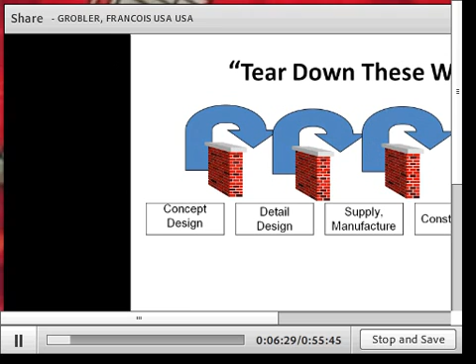As you might expect, there are all kinds of deficiencies as a result of these barriers. But at the bottom there, I think I just want to point out that I'm beginning to see the Corps of Engineers' responsibility very much in looking at this waste of resources that's happening out there, and the fact that we'll have to be building more with fewer dollars, and we have to do it in order to stay competitive in the world arena. I just listened this morning to the debt ceiling that has to be raised in six weeks, otherwise the government is going to stop functioning.

As you know, the debt ceiling is 16.7 trillion, and in addition to that, there are some other mandates that supposedly add up to over $100 trillion. So I think it's clear that in the future we have to do more with less.

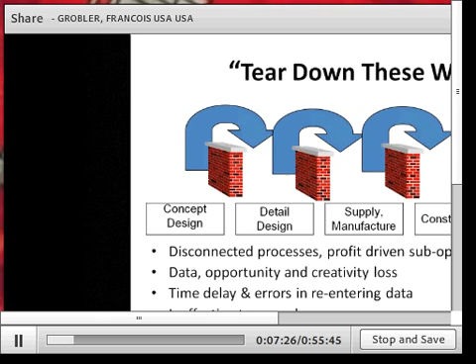This is the way I think we can address that to some extent, and we'll look at the extent in a little bit. The frictionless flow of information is what we're really after. If you start at the top there with design, construction documents, construction contract, and commissioning, those are the traditional arena where we're working, although we are spanning many of the other aspects now also.

The point is that as we develop documents and contracts and so forth, we want to deposit information that can be used later in the life cycle, and we want to take out information at a later point in the life cycle that would be useful to us.

And this is possible now using this IFC openBIM. It is a structure of information designed to carry the geometry of the building as well as tangible and intangible information in a way that it stays unified and can be used by others later. Now, not all information needs to be put in there, but the information that is used in the later operations.

So if you go around the circle clockwise, start with design and construction, or maybe earlier under the project program, and then you want to be able to later, when you're doing the FM and space management, check did that actually conform to the program? Or if you go further down, the master planning wants to know how did that work out and how can we do our next program better, and so on.

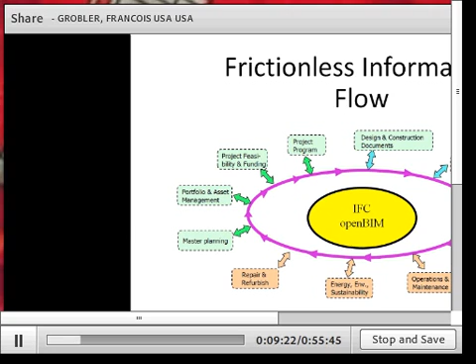It's a matter of data that we don't have at the moment, and I'll make reference to that in a second again. So what is BIM and what is openBIM?

I want to say first what it is not. BIM is not 3D CAD. I think many vendors and practitioners are thinking about BIM as 3D CAD, and that is not the case. And openBIM is not Autodesk or Revit or Bentley's proprietary formats.

openBIM is a vendor-neutral format to exchange shared information of the project and the facility as it moves along in its life cycle. And openBIM is unified information that serves as a resource for decision making and so on over the entire life cycle.

So I have a more formal definition of openBIM here. I'm not going to read it, but it's a digital representation, it's shared knowledge, it's the basis for decisions, it's based on the premise of better collaboration, and it's an open standard for interoperability.

So why open building information models? What does it really do for us? Owners, and I believe we're doing the same at the moment, are beginning to understand the value of data, and especially the life cycle values.

We're rebelling against being held captive by software vendors, being locked into a proprietary format so you can't use that new neat technology someone else had come up with. And we're realizing that you're paying for sub-optimization in those stovepipes or walls that we looked at earlier.

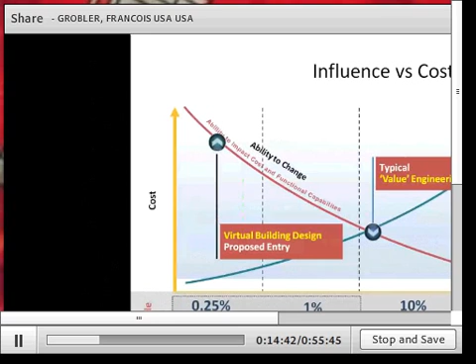Thanks, Mariangelica. Hello, can you hear me now? While we're waiting - yeah, you're back on. I'm not sure what happened, but I can hear you loud and clear. I think I leaned forward against my switch here that muted the button, so I inadvertently muted it.

How much have you heard of what I had to say about this slide? So we had just started this slide. Okay, well I'll try to repeat quickly then.

The organization of your tasks is arranged like in the green boxes up there, by task groups. The point I wanted to make is that in order to do life cycle cost analysis, how can you do that accurately without knowing the operational costs of similar and previous buildings downstream? We need the data, and the same for energy modeling - how can we know our simulations are correct if we don't have the measurement and verification downstream? There's great need for bidirectional flow of information here.

I'm sure you are aware of what's going on now through this series of presentations, but I think the consultants who are working on the engineering regulations down here should be very much aware of this also.

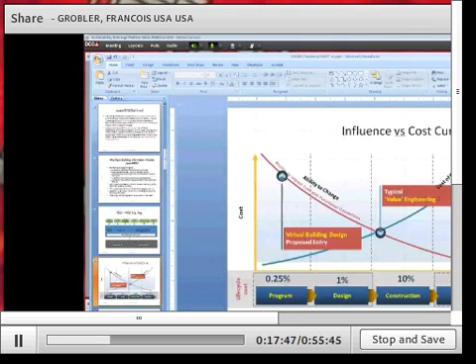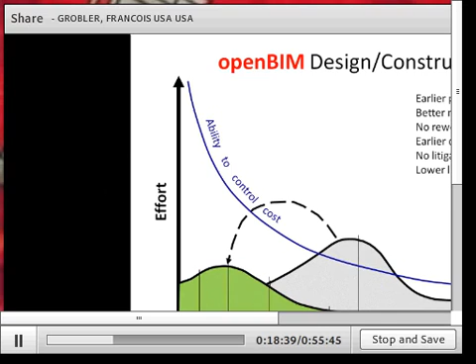So how much improvement is possible? I can give you the case of this UK BIM initiative that, among other things, conducted 5 pilot projects to test what savings they were getting. They did that in a specific district where they had to build 5 new penitentiaries - well-known designs with very well-known construction costs. 3 of those 5 projects are now complete, and they've proven they've saved between 15, 17, and 19% in cost over the expected cost based on previous experience, using this more integrated way of working.

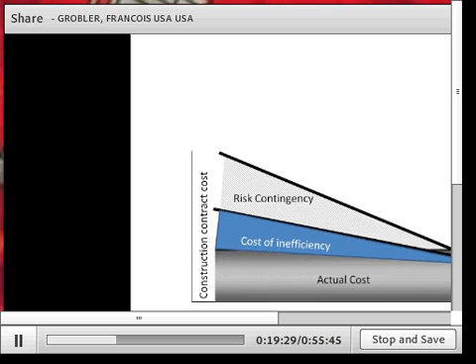One interesting part of that is they also expect to save millions of pounds in guard personnel costs over the lifecycle, because of how they interacted with users in the design process. They realized they can do with fewer guards if they make minor changes to the standard design, and that isn't even included in the 15 to 19% cost savings.

But the important point here is that this is their so-called level 2 BIM integration level, using current tools without the full integrated openBIM. In other words, these are things that can be done right now, tools they've already used. Anyone can do that if they make the effort.

A little more about the UK initiative. This fellow, Francis Maude, is apparently the number 2 person in the government there, just under the Prime Minister, and he is supporting and saying these things. It says this government's 4-year strategy for BIM implementation will change the dynamics and behaviors of the construction supply chain, unlocking new, more efficient and collaborative ways of working. This whole sector adoption of BIM will put us at the vanguard of a new digital construction era and position the UK to become world leaders in BIM. That sounds like a challenge to me, to the world's largest engineering concern.

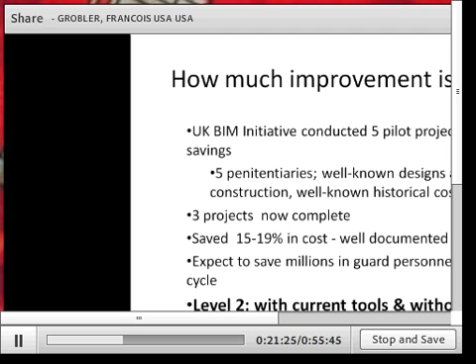I think it will be very worth your while to look at some of these things on this website, the BIM task group. This is the actual live website now, and you can see all kinds of information and resources there, like COBie UK, data drops, and other things. There's a lot of information here that would interest you, including their partners, tests they've done, news, and so on. But in the interest of time, I'll probably have to move on.

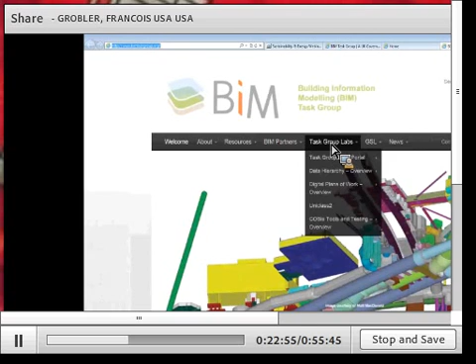Let me just go back here. I'd like to show you a little bit of Mark Bew's presentation, which explains the different levels, level 2 and so on. Mark Bew is the fellow really orchestrating this whole initiative, and it's a very large one. Most of the funding goes into working with industry to come up with standard terminology and standard processes, and some of this goes into the actual work.

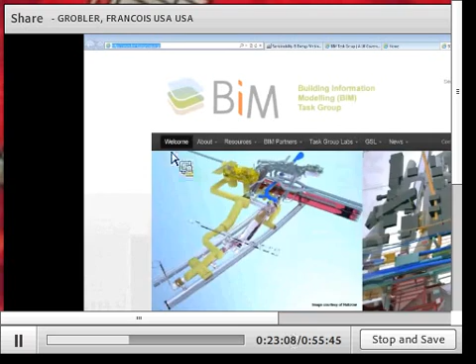This is based on some documentation that might interest you also. You can see this comes from a low carbon construction report and a building information modeling working party strategy paper. So this is the result of very deliberate planning. The hypothesis they're working on is that government as a client can derive significant cost improvements in cost, value, and carbon performance through the use of open shareable information.

I think this is the push and pull side we talked about earlier. On the pull side, the government needs to know how to be a good buyer of data. Data is very important now, and while we still think of ourselves as buying buildings, in fact we're buying buildings as well as data and services, and that pull side should be clearly defined and done consistently, leaving the how to the supply chain. On the supply chain side, early warning is necessary to give direction, assistance, and clear indications of milestones and expectations, as well as organizing training and developing the methods and documentation needed.

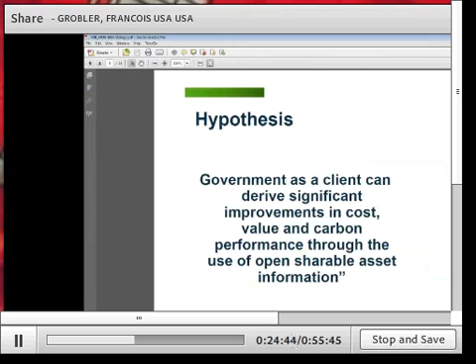Their BIM level 2 is going to be completed by 2016, meaning they will have done everything they want in terms of current technology, then switch over to the integrated technology. Here's a diagram showing what they're doing. Level 2 is in the middle at the top, and this is what they're using right now, perfecting all the data sources and so on, so that by 2016 they'll be completely doing it this way. Then they'll switch over to the full integrated, interoperable data in that full circular motion we looked at earlier, being web-based and cloud-based.

This is the organizational structure. We're not going to go through all of it, but you'll see there are stakeholder groups, delivery groups, and so forth. Here's Mark Bew, who made this presentation. So, very comprehensive and deliberate in what they're doing.

Let me get out of here. Okay, so I think I'm going to move on here because I see my time is running short.

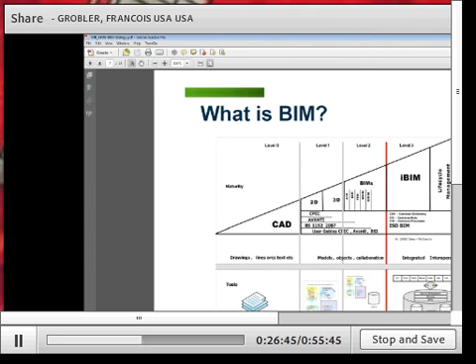What is BuildingSMART? We're talking about BSI, BuildingSMART International. BSA, BuildingSMART Alliance, is the American chapter. It's a not-for-profit organization, international and chapter-based, with representation in its various organizational parts. It's global now, with proposed chapters in India, Brazil, Chile, and Russia. China just became a full-fledged member about a month ago, and there's great interest in that at this point.

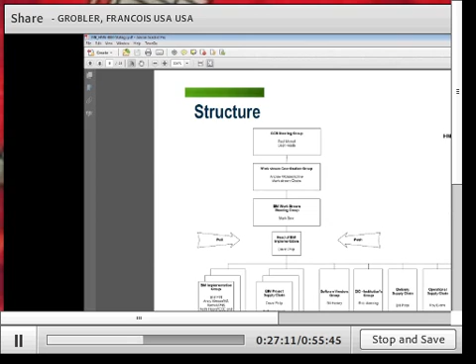The BuildingSMART details - I had intended to cover the vision and mission, but I think you probably have a good sense of what that is at this point. Essentially, it's internationally creating a forum where people can get together and work to make these necessary standards on an international basis. We'll look at the organization in a bit, and the customers are all of the main participants to the process.

The products, or the outcomes of these efforts, are essentially listed there. Firstly, building processes - these are analyzed and agreed upon by users like yourselves, and documented in something that can be reproducible and discussed.

The outcome of that then goes into an exchange requirement, where all of the information that needs to be passed back and forth in that process is explicitly defined - what is mandatory, what is optional, what formats and constraints there are on the information, and what kind of classification system you use for this particular data. So it's well-defined information of what is necessary for that process, as well as recognizing what information is necessary downstream to drive the downstream processes.

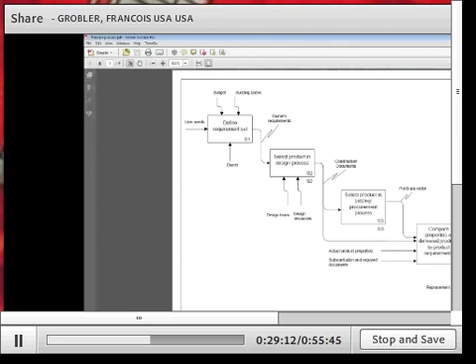The other product is the IFD, which stands for International Framework for Dictionaries - a fancy way of talking about catalogs and e-catalogs and how to define terminology for it, and to provide unique identifiers. The GUID stands for globally unique identifier for each of these terms, which can then be translated into all kinds of languages, or even regional languages. On the West Coast, people talk about things differently than on the East Coast in some cases, and with a GUID that's unique, you can identify the exact term across languages and terminology.

And finally, product templates - standardized templates that industry users as well as producers agree upon, so that when they publish their data, they at least publish it in that format and content, so users can compare oranges to oranges, not apples to oranges.

In the next item, all these things become formal standards. The IFC model, or IFC BIM, openBIM, which we already talked about, has been an ISO standard now in various phases for probably a decade almost. The latest version, the 2013 update, is more complete and covers a wider scope than any of the previous ones.

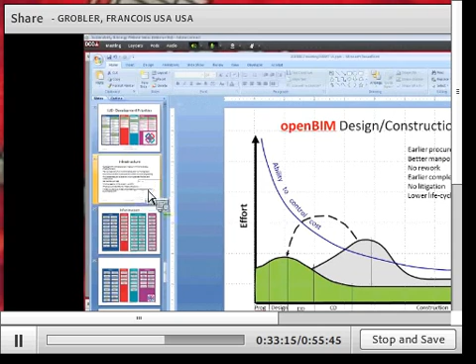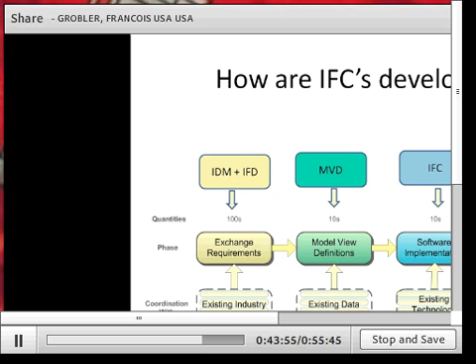Okay, there's some more details of how these things work. But I think we need to go on to where COBie fits. I quoted Bill East here who said COBie delivers a higher quality product at each project stage by standardizing the information exchanges that are already in our contract. So there are already information exchanges required, but this is a way to make sure it actually gets there and can be tested that it is there.

Where COBie fits within the overall process is that it fits very well, because COBie is in fact a subset of IFC, and it is mappable directly to IFC, and there are utilities that have been made available that could do that. But there's one drawback: COBie does not have geometry and it does not have the globally unique identifiers. These globally unique identifiers are necessary if you put it back into a CAD model or a BIM model, to know which data goes to which object.

It is an official BuildingSMART MVD, and it's been incorporated in this latest IFC4, and there's a group now going through that again to make sure it satisfies all the international requirements. So very much part of the IFC development and BuildingSMART plan.